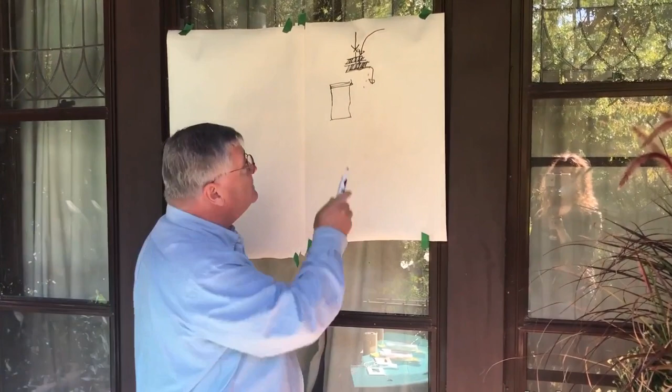With air sealing, if we draw a door, we have three typical areas. We're doing the top - now the top often uses the same piece that's on the sides, so you just have to work out how you're going to apply it. On the bottom, you have the wearing of feet, so it can often be worn out. A typical one we'll see is a metal plate with a rubber top that presses against the door so air doesn't go through, and that can wear out. We're going to look at this technique for doing two types of doors in a couple of minutes.

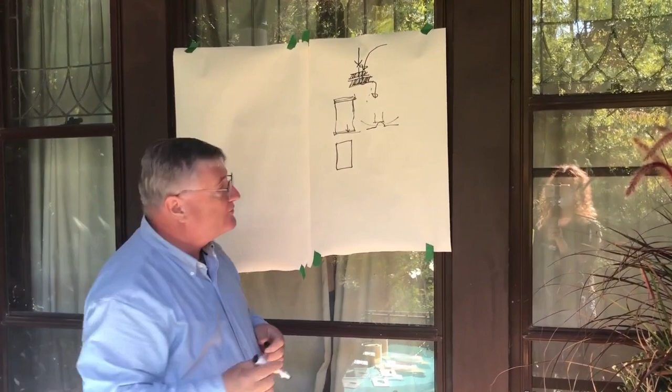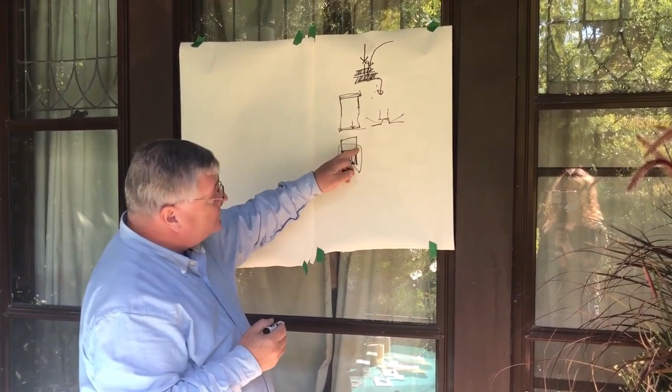Windows don't have people walking through, but with sash windows, the window comes down and we generally put a weather strip here. Often the frames go out of balance and air gets through. We'll also look at the sides - there's a technique here too. Again, you get a zone where you use the same material on certain sides, and where there's a wear point, you use a different type of material. So when you go out to get weather stripping for doors or windows, you're buying two types of weather strips - you can't use the same one throughout.

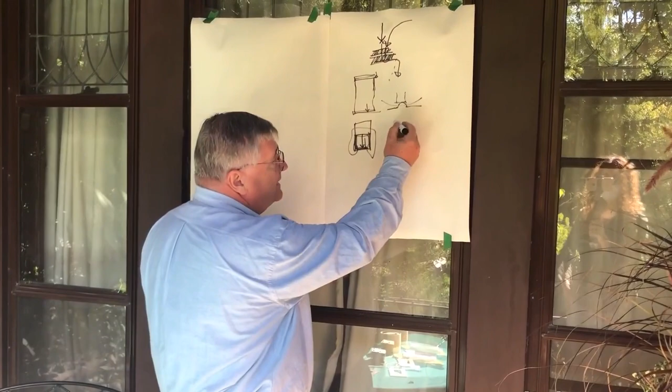We're going to look at a special type of door system. One of the most common problems with doors is the threshold is flat. It doesn't have any profile to capture weather stripping.

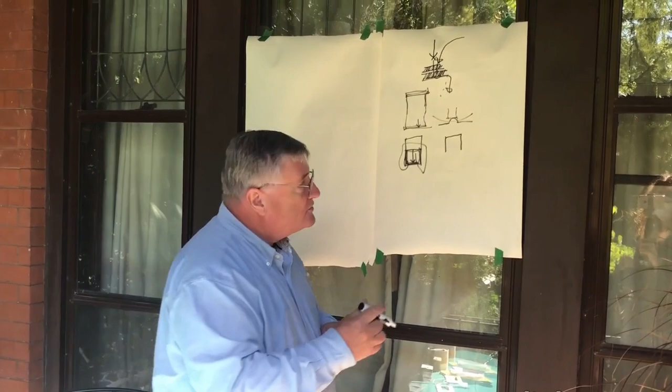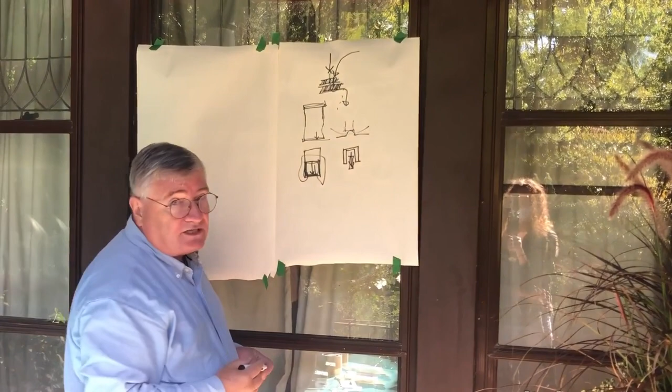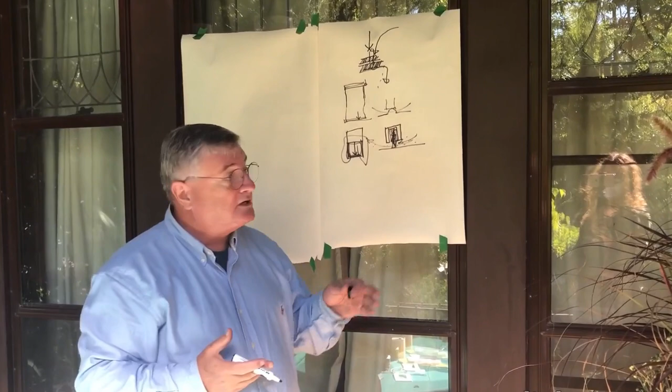So what we're going to look at is a special type of weather seal that, when it's pushed, comes down onto the gap so that gap doesn't have any wind going through. This is all your wind coming this way, and so you don't have it. But when it's up, the wind can go through. That's a standard detail you can put into doors, but it requires planning.

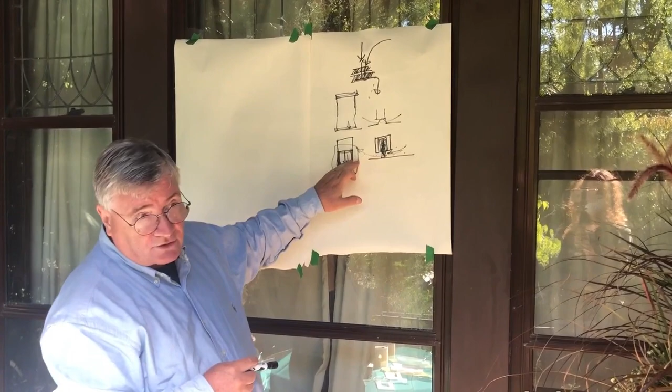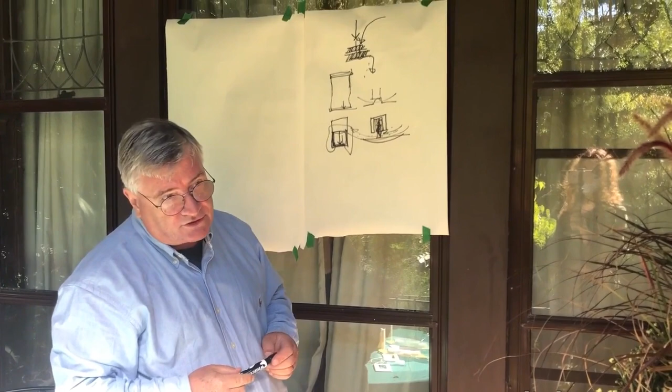But it's a very common detail to find in old houses where we just have flat doors. The other issue, which I'll show later, is that sometimes with foot traffic, the threshold wears out because the feet wear out the stone. In this house, which is just over 100 years old, the stone has shaped - it's taken the foot traffic. So now you have a permanent air gap going through. I'm going to show how we deal with that.

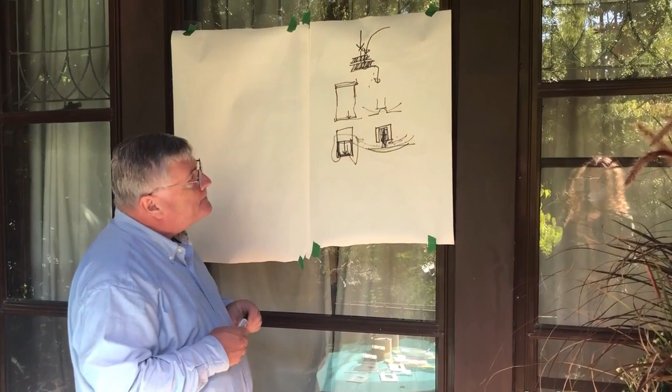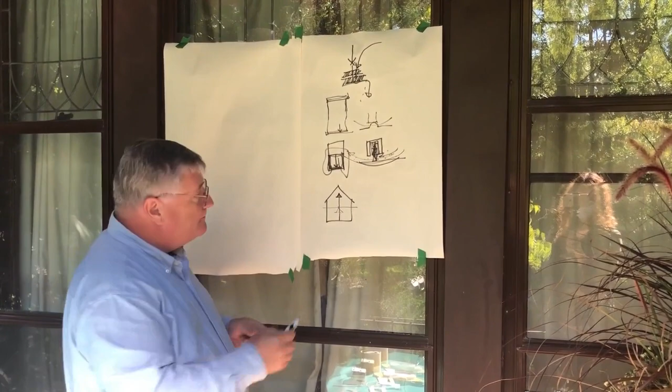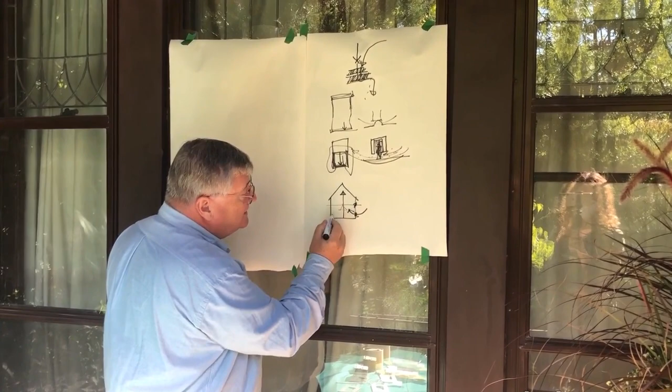So we have air moving through a house. The action of air coming into a house is guided by the strength of what we call the stack effect. If you're in a one-story house, the stack effect isn't very high, but the higher the house gets, the stack effect increases. The stack effect is the suction of air that comes into a house. So what we're trying to do is limit the flow of air into the house so that we don't have this stack effect.

This is of tremendous importance in terms of energy conservation. So if you have a very tall house, you need to address the stack effect, which means you also need to stop the air coming out of the house.

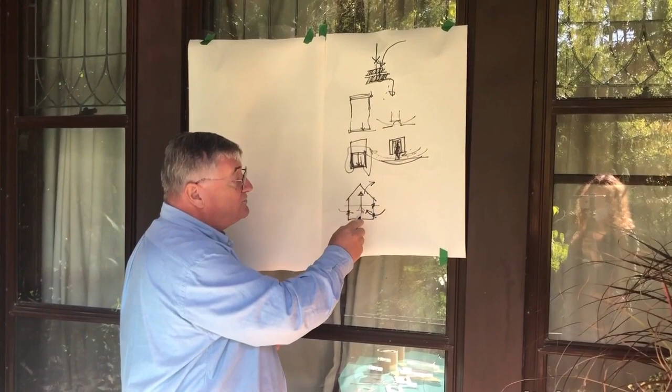So not only are you stopping air coming in, you're stopping it going out. Your air sealing approach or strategy must address both the entry and the exit. In many cases, people just focus on the entry of air into a house because most of these products are about air coming into a house. But the big issue is, how do you deal with the air coming out of a house?

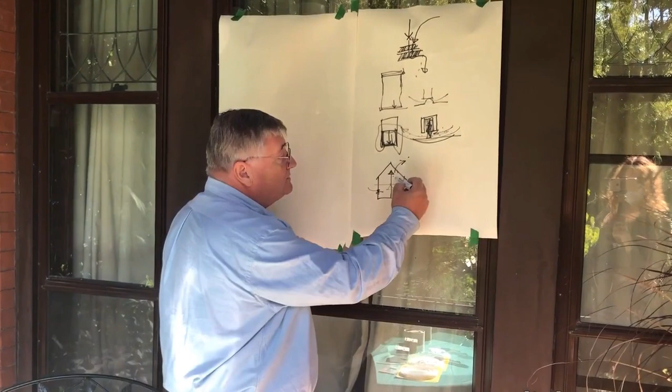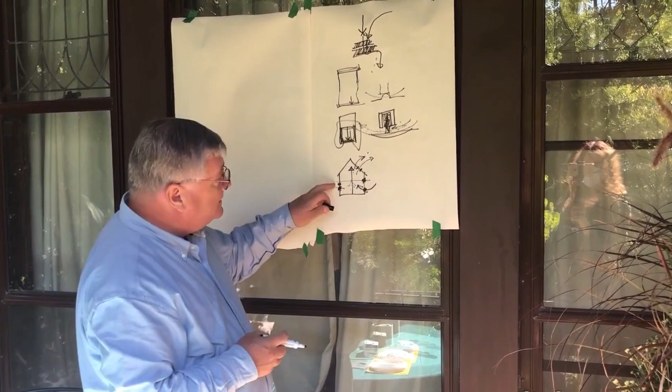And often it's the case of large holes - you may have a hole here. What happens when people do air sealing is they manage to seal all the areas where air is coming into the house, but they don't think about these areas. They've done an awful lot of work, maybe a week's work sealing all these holes, but they never got these holes here. So these holes become even more efficient at taking the air out of the house.

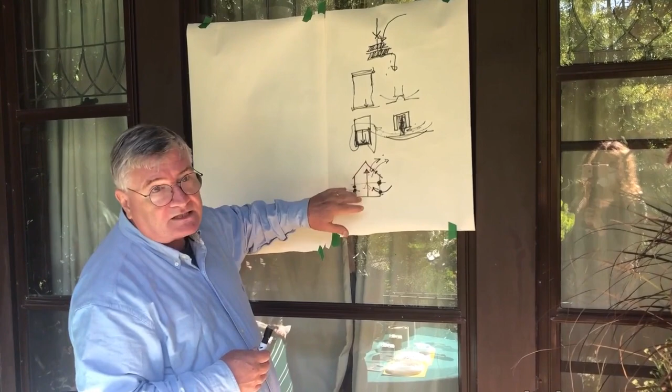So when one addresses a strategy of air sealing, you must balance what is coming in and going out. If you unbalance the flow of air, you're going to increase the amount of air that goes out, which means you will lose a lot of warm air inside your house.

This is another common problem with houses. I'm looking north at the moment, and so we have the northern winds coming in, which are often very cold. We took down an extension here which stopped the house seeing the back garden. But what we have is a doorway, the original doorway of the house here, which was coming into an internal space. For years, it was always a cold door because the brunt of the wind is hitting it.

So we built a draft lobby. A draft lobby is a technique of controlling the pressure of wind on a door from the outside. It's not sealing - what it is, is creating a room, a draft room. So what we did is put one of these standard ubiquitous aluminum doors just to take the brunt of the wind, and then we do the air sealing on the inside, because it can be quite brutal in the winter with all the northern winds on this door. This door allows the vision out into the garden, but we'll be focusing on this one here.

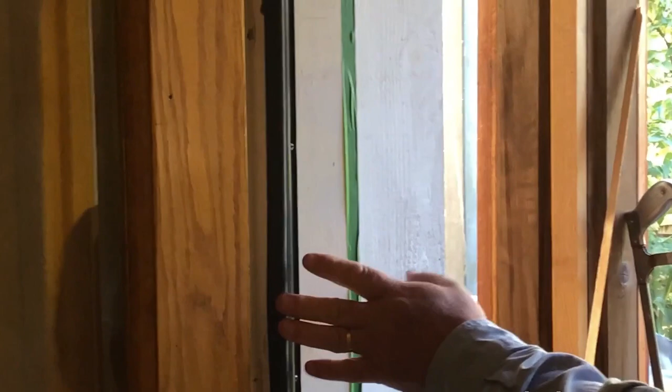Now, the thing is when you're buying air sealing, you need to make sure that it's going to be hard wearing. A lot of people buy very cheap sealing, which is just foam that just goes around the door to the house. This is actually quite hard wearing. You can focus on it when I have it opened, but it's a vinyl outer thing, and then there's a rubber on the inside. So this can take a lot of wear. So when you put this in, it'll probably be here 10 or 20 years, depending on the use.

I've taken this one off, but it had vanished in the lower area because the dogs keep coming up to the door, scratching the door, and their nails pull this apart. So you have to try and work out what your maintenance is on some of this type of stuff. If you have dogs, you're probably going to wear out door seals. You can see all the wear that they've done to the door, so you can imagine how they just ruined all the wood here. So let's open this up, and we'll start, okay?

So the issue here is that you can see it's quite a long piece of product. And the reason is that it matches the approximate height of a door. So you see here that it's cut just long enough so that this bit would be cut off so that it can fit in here. So we have two of them, one for this side, one for this side, and then there's a short one which goes across the top. As I said to you earlier on when I was doing the drawing, the bottom piece is always a different detail, and often it has to be hard wearing. So what we're going to do is we're going to measure this and we'll cut it.

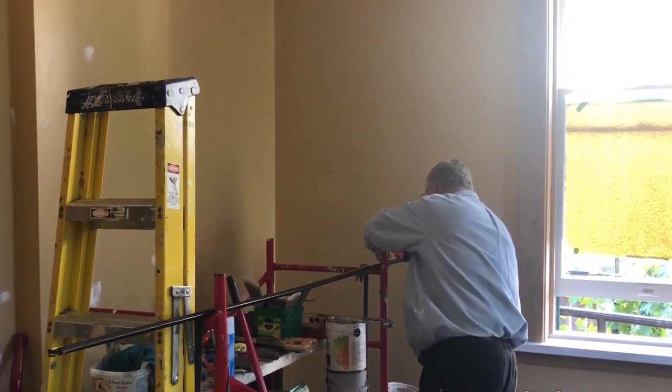So what I'm doing here is I'm looking at the dimension, and it's 2 meters 40 millimeters, and I'm noticing that I'm not going to end up with a hole to hold the bottom part. So I'm going to make 2 cuts. I'm going to cut this so that I can get the hole here, because there's a hole. Can you see the hole here? Now, if I use the actual dimension, I'm going to miss the hole. You want to really make sure that the outer edges of these units are always very strongly fixed. So I'm just going to cut this here and then measure after that. Everyone has an old metal saw.

I'm going to have them closer to the termination points. You can see I have one down here. So I've cut it so that I'm going to have this matching on the inside like the other way, and this is where we're going to have the item. This is slightly short here, but that's what we're going to be doing. And so they're going to be connecting. And then I'll show you how we go and deal with the installation. So we just have to make this 240.

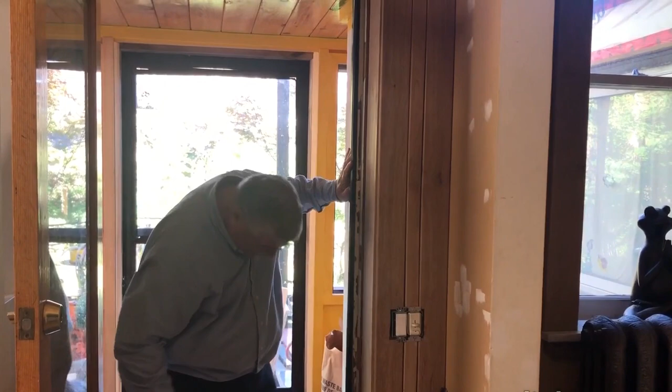This one goes up here, like this. We can connect them. And this one, I have just enough. Okay. So about 4 millimeters. Sometimes you have to make it a tiny bit longer so you can take the slope of the threshold. So there we are. And this fits right against the ground. And this is fitting in here. So it's a fairly easy application.

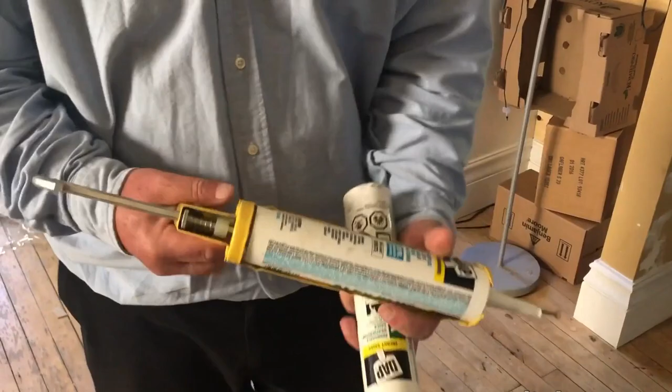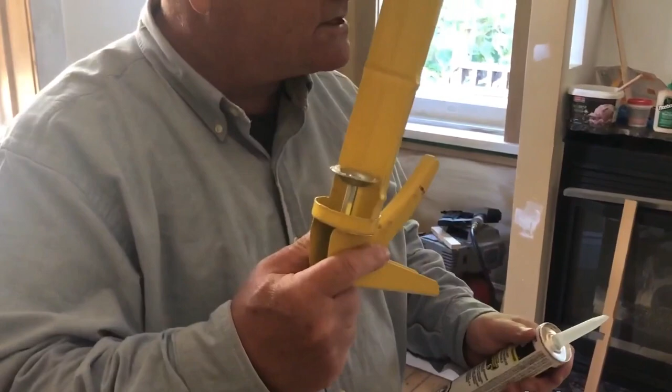So we've cut it on an angle, because it's a gentle bead. So what we will do is we then have this item here. This is in case people haven't used this type of stuff before. And this is for making a hole in the seal. You see, it's just longer. So you just go and create little holes. Maybe one hole is enough. Put that back. This actually so happens to be quite a good gun. Quite a lot of contractors have used it, and they've said that it's quite good for its expense. And you can see now that the stuff is coming through.

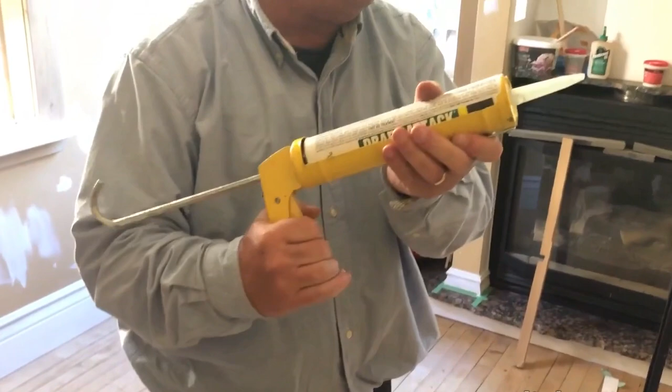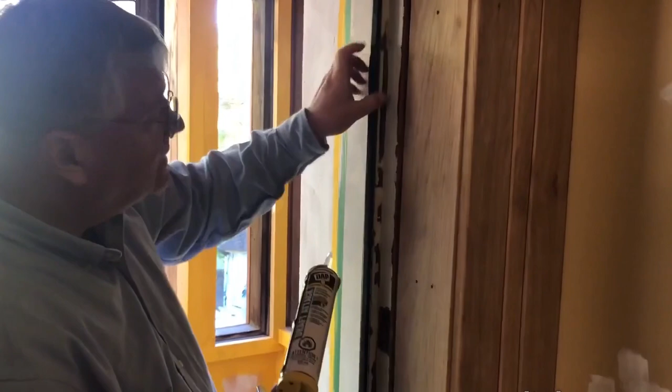Do you see that? So if you come up and get a detail here, we are going to put a permanent bead of caulking all the way down here so that we don't get any air going underneath the seal, okay? Because otherwise we're defeating the whole purpose of the seal. These are where the screws go, and this will put the sealant on here.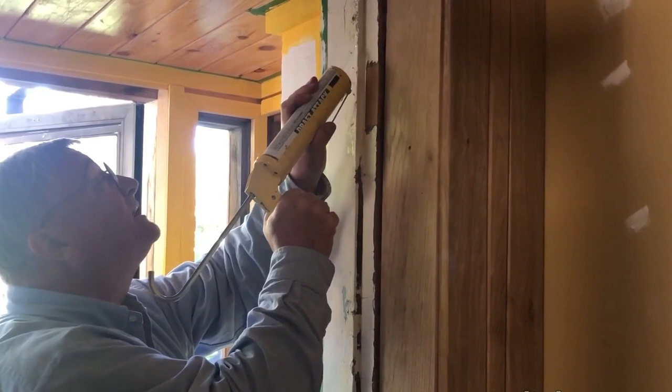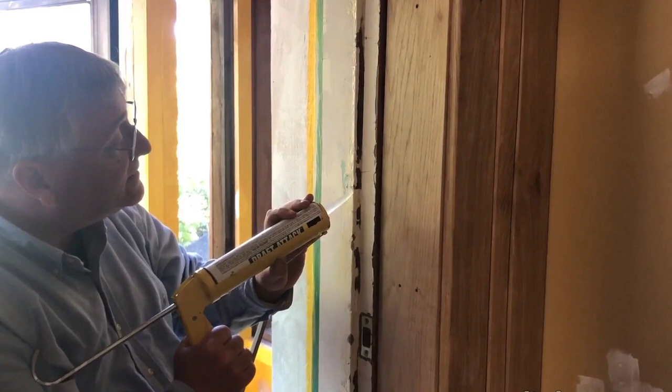There are many different types of silicones you can use. Sometimes it's actually good to have them as removables. This is actually a removable one. Put it down on the edge so you can get it done. We're going to be screwing the seal to the door frame, so there'll be a lot of pressure put against this bead of sealant material.

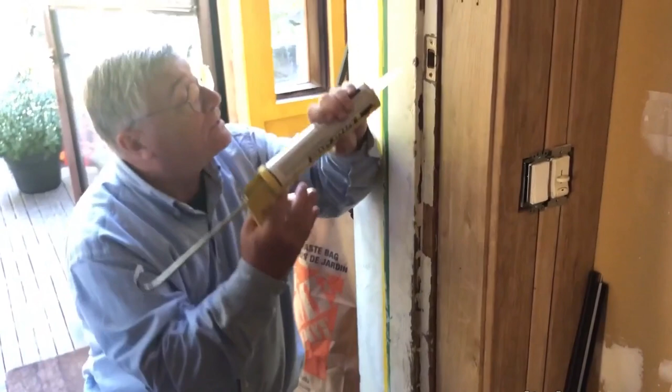But you can see that actually it's really quite inexpensive. We have a sort of plug and play approach with these types of tools now. So you don't have to be going out and making arrangements with special companies to get this done. It's something that you can do. And if you buy very good stuff, it'll probably last the best part of 20 years. If you take better care of it, maybe it could last up to 50 years. But they tend to have a lot of plastic in them. But this will really limit the access of air at this door.

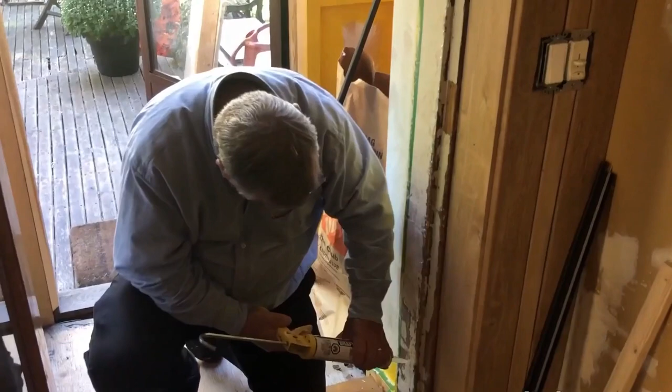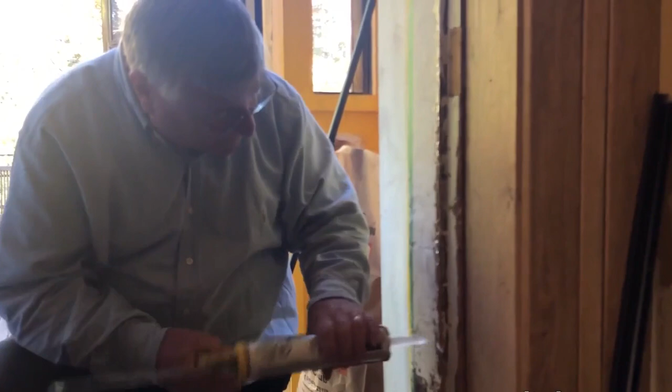Now, I just didn't prepare this enough this morning, but normally you would repaint the door, which is something I'll have to do. That's why I'm using the removable one, because I'm getting it in, but I'm going to have to take the seal off when I start to paint the door. So that was the reason why I was using the removable caulking. Make sure you're always sealing this stuff so it's not drying out.

So we now have it in place. We have the seal that we want to put in. Now, just to remind you of silly things that happen, you could put the thing in this way, okay? But it's incorrect. It's not facing the door that's going to close, so it's not going to hit the seal. And you've got to make sure that it is. So once you have it started, it's an easy process to know what to do. But make sure you get the seal in the right way, otherwise you're going to have to take everything out.

We have this sealant underneath the thing. Often you're not told to do this, but it makes sense to do it. And now we're going to put this in. There we are. So just put the thing in. As I said, cut the foam a bit longer so you can make sure it's touching the very bottom. Get the thing aligned. And then just do a test run. Check with the door. And if you have a pen, close the door.

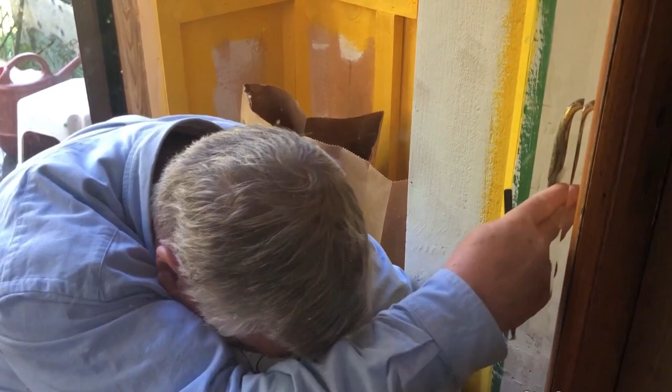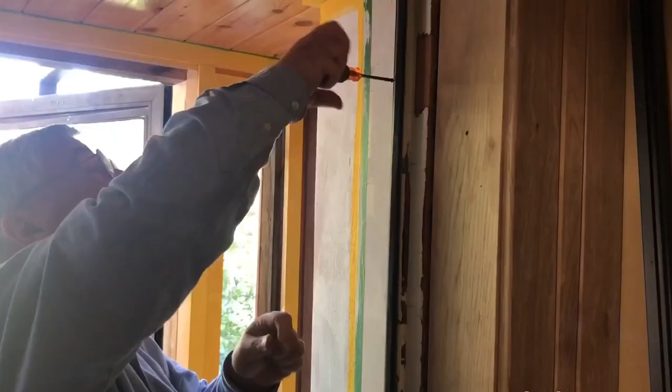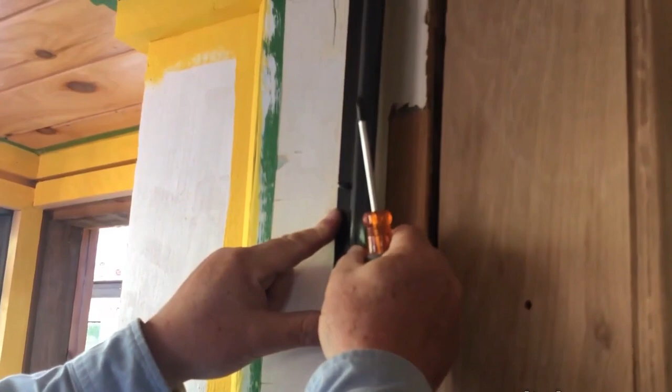The reason you do that is to make sure that the door is closed tightly against the item. And then, nowadays, they're getting very sophisticated with the way that they give you the screws. So I'll just cut this. Now, the other thing to notice here, if you zoom in, you'll notice that it's a long hole, so that you have play. You can maneuver the thing properly into space so that you can then put the screw in.

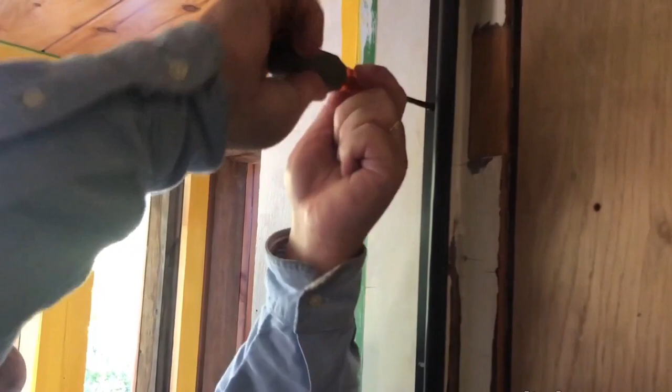Now, the screw is going to pressurize the sealant that we have underneath. So now you're not going to get any air under this. This one is different from here, and it's been glued, so there's going to be no air getting through here either. So I'll do the other ones later, but you just have to align with the line that you made.

What's happening here is that the acoustic sealant that I used is actually holding this in place. But you don't need big power tools. I've tried to take a very simple approach to this, because the simpler it is, the more likely one is going to put these things in, rather than living with these points of air leakage. So there's about 12 of them that we have to do. This is up here, this will be connecting here. You might want to come out here.

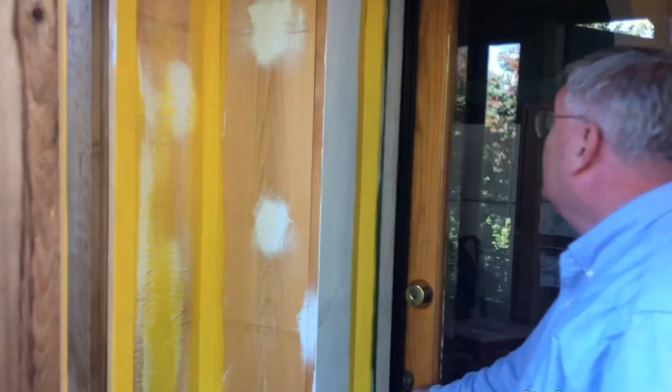And then watch the door close against it. But you see how it's pushing? You might want to come out quite close. You see how it's pushing it? So you want that to be pressured. And now we've got this where all the dogs were scratching and they'd removed all of it. Now we got a new one in. So that's good. Again, one would try putting caulking in all of these gaps. That's what it's all been planned for.

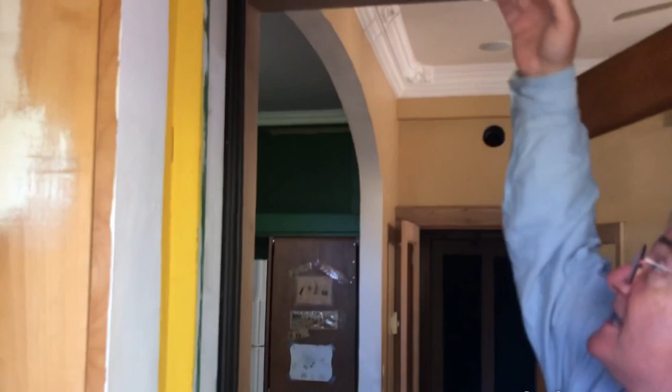Let me just show you what happens with these windows. The windows have leakages everywhere. Just a typical window, it has to have slack. It has to be able to move. But you know, if you have a winter wind, that's going to really tell you that there's something happening outside. So you want to control the air, because that rocking is actually pressuring and pulsing with the wind, and it's bringing it all in. So you want to have it tight, and you want to have it fitting against all the edges so that you reduce the air coming in.

The other thing is, if you come up here, you'll see that we're looking at trying to get this side here, because you see how the window moves here? See how it moves? We're playing with about 2 millimeters of gap there, maybe 3, and that 3 millimeters would be 1/8 of an inch. And what we need to do is put a sealant down here. We can put one here, but as I've said, anywhere where there's a passage with gravity, it often gets worn out because people are walking on it or passing things. And then we have to look at where this gap here is. Here it is here.

I don't know whether your filming is going to pick it up, but you get this back bit of window here, and you want to stop the air coming in there. You see how much it moves. Now, there are all sorts of other things that we have to do, but it's important in summer that you can get cross flow, because then you don't have to use air conditioning, particularly if you're taking the air in from areas where there's shadows.

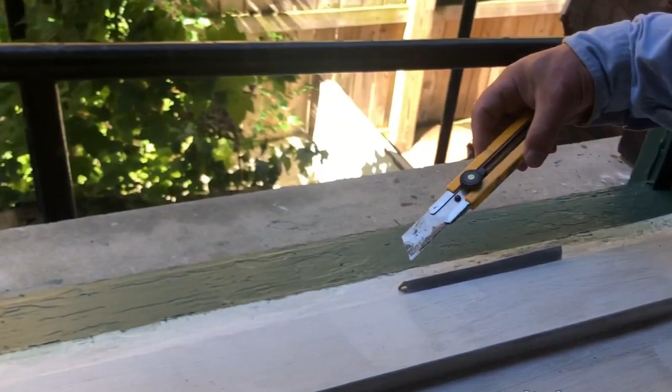And this gets put in, it's got a piece of sticky tape here, and you stick it onto your window. So what you would do is you would put it in against this side here. I've made this bigger because the piece of plastic is just so small and the V so difficult to control that this piece of cardboard will show what we do: we put it against here. And if you focus in here, you'll see it's pointing out. So it wants to rest at that width.

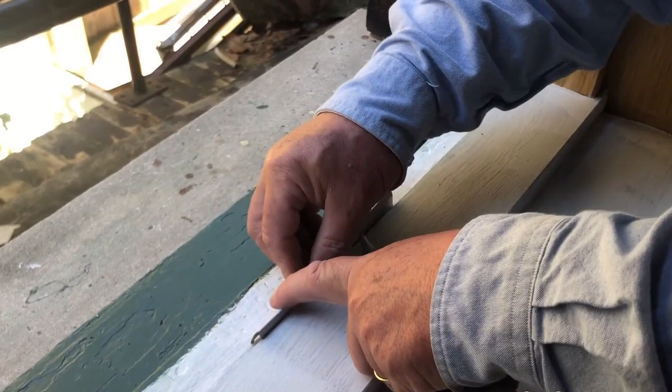So that means as the air comes in, the air is not going to go against the piece that's stuck, and this opening piece will rest against the window. So if you put it in properly, you can then close the window. That's why I'm saying these are very small pieces. So what I'll do is I'll just show you.

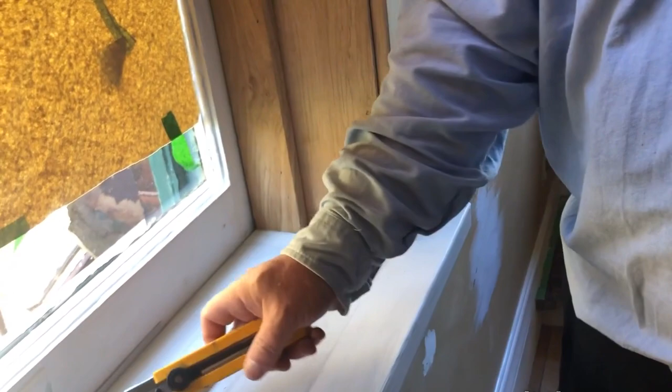If it goes into the window, this is what you're going to get. And it's going to stop the air. It's projecting at the moment. You can get different heights, but I'm just doing this to show you. And it will stop the air coming in, particularly if that's glued and it's pressurizing against that. And you can even see that it's actually stopped the window moving already, okay? So I'm not saying that's a test, but it just so happens.

Now, I want to show you what we do with the bottom of the window. This detail runs around here as well. Now it's a very thin piece of plastic. It's very difficult to see, and you can easily put it in incorrectly. But it goes here, okay? And you can see that on windows, there are different heights for all of these pieces. So you won't see it, but it will definitely hold the wind off. Very good and very inexpensive. They're about, I don't know, $3 or something to get enough to do maybe 2 of these windows.

So what we're going to look at now is the bottom of the window. And let me just show you, this is a rubber window seal. Forget this, it's just trying to say how great they are. But it is useful to see that it remains flexible at -40, which isn't that cold actually. But it's useful to have. We have how it's made. It's got a self-adhesive, which means it sticks, unlike what we just put in at the door. And it seals doors as well as windows.

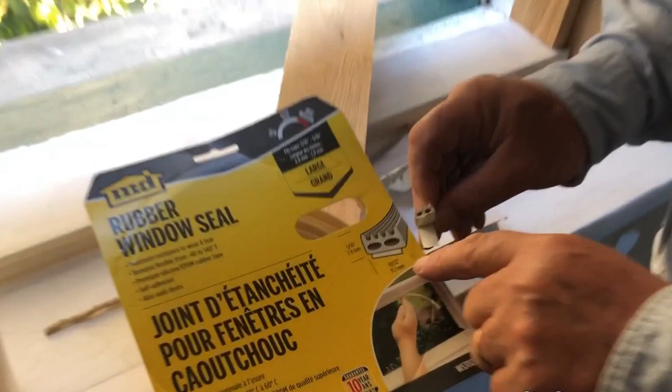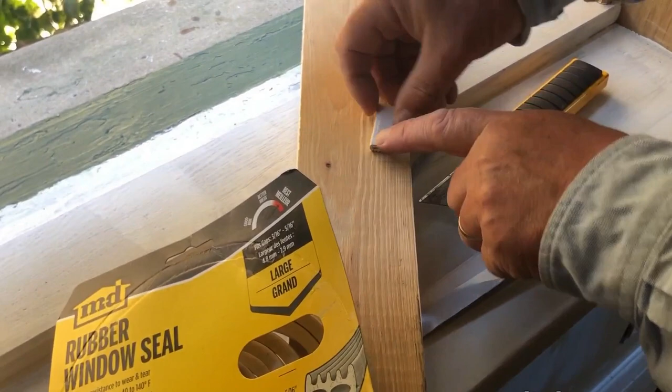And what happens is, when we put this on, it's going to pressurize against the thing and it's going to close. So if we were to use this bit and put it here, like in the thing here, we could see this closing down, okay? So that is another way of trying to address the air that comes in at the bottom of a window.

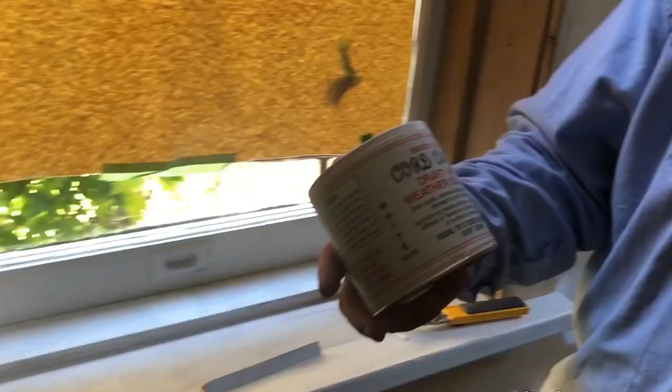And it's what they call a draft and weather sealant. It's made of a sort of a cotton twine, and it's soaked in wax or in paraffin wax. So this one here stops drafts, window rattles, and moisture damage to sills and floors. It's a non-drying, flexible polymer sealant, and it will not adhere to hands or clothing. No cleanup of surface is necessary. For the most part, that's pretty true.

You can see its color. It's actually white. Here it is here. It looks like a piece of wool really, and it's quite flexible because of what it's made from, and you just push it. So this is an old piece. This is about, I don't know, 15 years old, but it picks up all the dust. So eventually you've either got to clean them or you get some new stuff.

But the useful thing is that you can, on a warm day, not on a cold day, put this in here and you just wedge it into the holes. You see how I'm doing it? This is a very inexpensive way, and really I think quite a sustainable way of dealing with technology and the constant issues of things like air coming into houses. You do this to all the sides, and that will last all winter. You won't get anything going through. I think it's actually a pretty neat idea, this one.

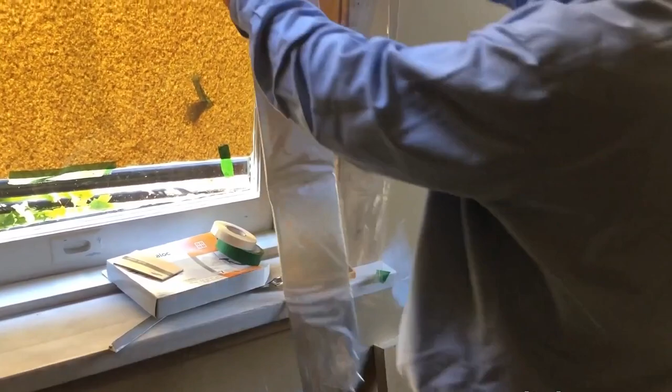And then you unfold this and you'll make it larger than the opening. You'll maybe give it that much, because you mightn't put it on straight. So if it's on a bit of an angle, you want to make sure that you get everything. Everyone seems to think we put them in perfectly, but we never seem to. So you put it down, plenty of stuff here to take on the accidents and misalignments. And then you just rub it on. Again, try not to do it on a cold night, because the glues won't work.

And then when you're finished, you use a hairdryer and you just heat it. Don't heat on one spot, because you'll burn out the plastic. You see how thin this plastic is. So too much hot air on this will actually create a hole. So you go very gently over the plastic and you keep going down, allowing that to cool, and then you come back down again.

As you heat the plastic, it contracts and gets tight. But you have to make sure it overlaps everywhere so there are no air gaps, because once there's a gap the wind can get through, open it up, and you've got a flapping thing. This is important, particularly if you can't afford double glazed windows and you're sitting beside a cold window in winter.

Often if there are windows overlooking TV areas, people get air coming down the back of their necks. So that's enough on this.

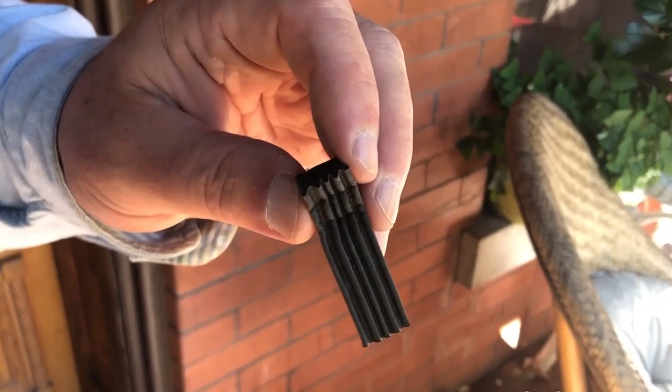And what we're doing is, we have this piece. Now, I don't know where I put it - do you need to see the big thing of it? This is similar, but it's what you use for a car. If your car door is leaking, you can buy them for car doors.

And what I've done is, it fits in here. Can you focus in on that? Here - so when the door closes, it's going to close against it. But this isn't wide enough, so let me just show you.

Any of the plastic receptacles - all of these things are built with a little plastic cup, and they sit into it so that the air isn't coming through. But a common issue is that when you have an existing house, you have air coming out of this, and again, you're losing energy. So what we can do is put this little seal here, and it's going to cover over the hole, and then we can screw this into...

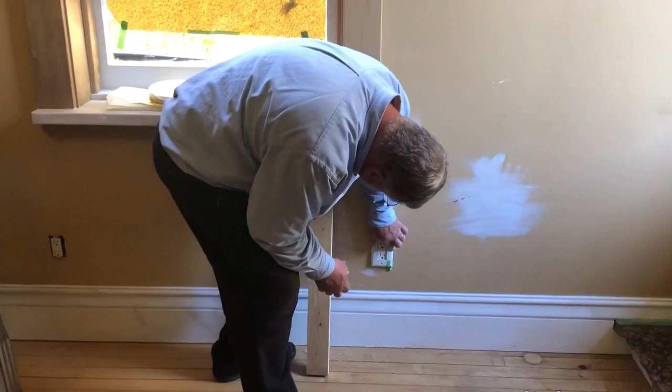...the original thing. We have the screws here - whenever you take these off, always make sure you've kept them. We just put this here, and then we can screw this in here. And that stops the air coming through.

It's a gentle technique, and it's inexpensive. But really the receptacles and these boxes should be in the plastic containers that hold it and stop the wires going through, because there is going to be a lot of air in these walls.

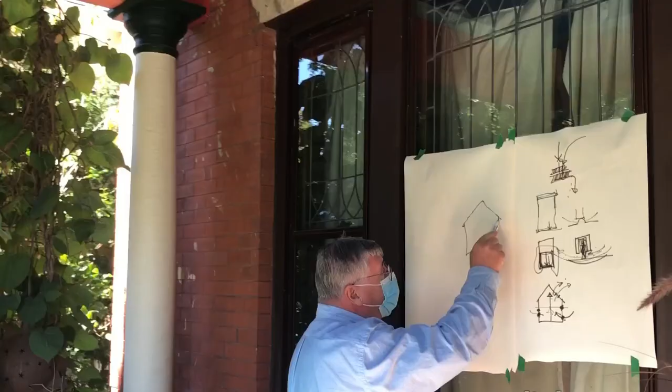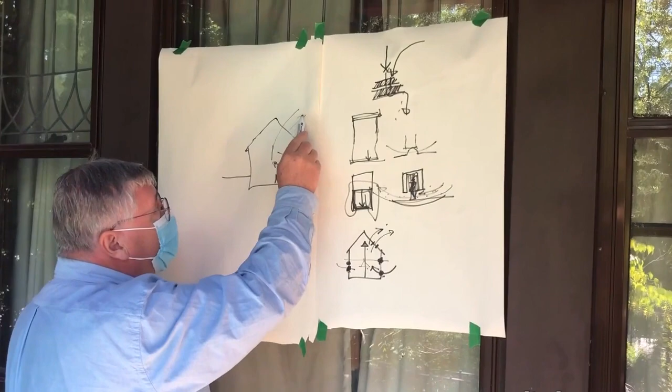And you have to look at all the areas where the air is coming in, okay? The air actually also comes in through the sewers. So we have air coming in, and then we have air coming out. This could be a project that takes several years, maybe 3 years, spending maybe a week each year on a couple of small projects to seal the air.

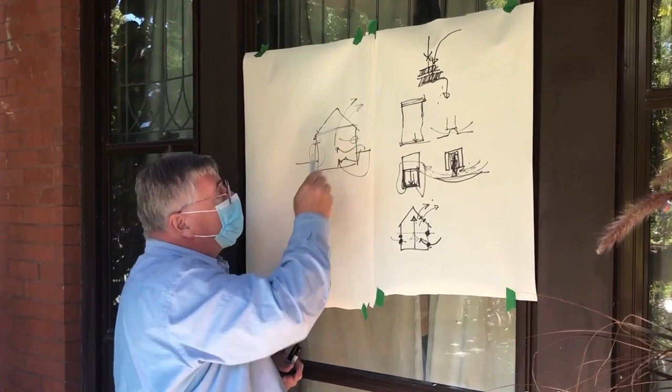And so we look at the windows, we look at the doors, and we look at the things up in our roof to try and stop air getting through there. We also have the internal walls where air comes in and goes out into the attic. So we have to stop the air on the inside walls and on the outside walls - everywhere you have this issue of air moving through the structure, we have to capture it.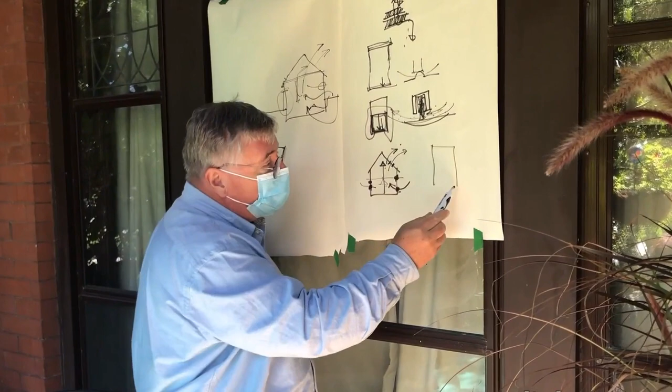What we've done today is we've looked at doors that face north, and we've looked at how you would replace the seals on the 3 sides of a door, and then a movable seal on the threshold. The other example was the front door, which was double doors, and we looked at trying to put in a special plate there, a pressure plate, and how you do the 3 sides.

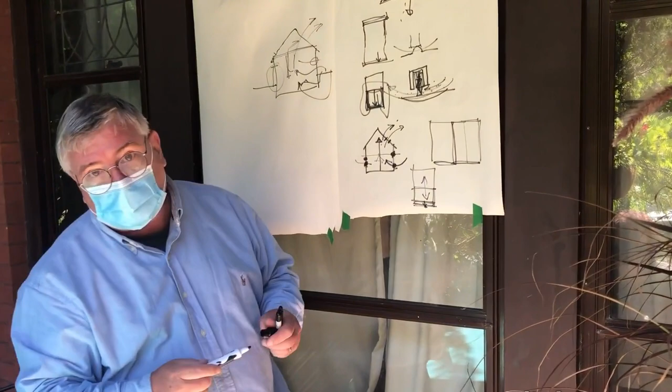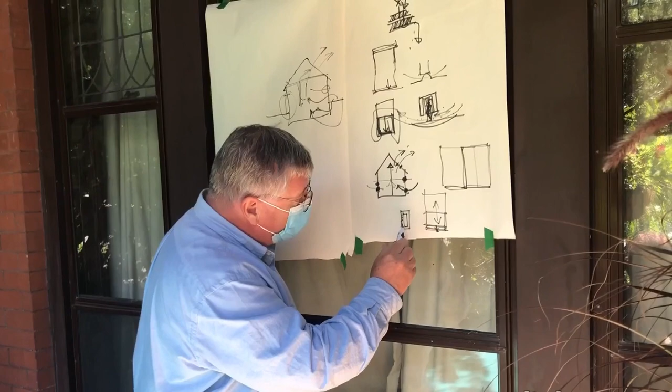Then we've looked at the windows, which were sash windows that go up and down, and we've looked at sealing on all sides, and a special seal that then moves down against the sill of the window frame. We've looked at the electrical outlets and how we can get a foam piece that goes around the electrical outlet, and then you put the finish cover on it, which can stop air as well.

And we've looked at the acoustic sealants, or the air sealants that you can use in gaps, and you've also seen the use of sustainable cord caulking. So that's about it on sealing.